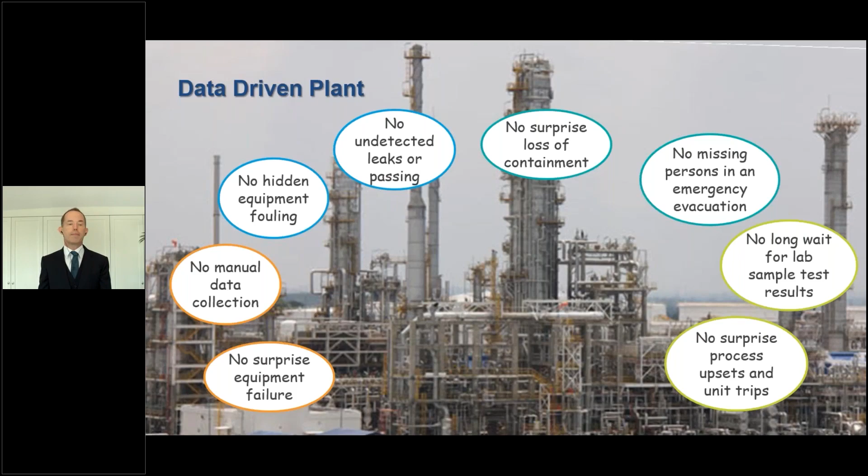So I'm going to speak about three things today. First, I'm going to start with a quick recap of the industry challenges, which is why plants need to change. Then I'm going to talk about digital transformation, which is really how plants are changing. And then lastly, I'm going to give some recommendations for what plants need to do. So I'm going to start with why. And it is really the state of the industry.

So several industries, like oil and gas and metals and mining, even power generation, are struggling right now and have been on a downward trend for a long time compared to many other industries. But even across all industries, they need to make some improvements. And really the reason for all of this is there are several disruptive forces going on in the industry right now. For instance, there are uncertain feedstock prices, there is unstable energy pricing, there's a shift in demographics as older, experienced people are retiring, and at the same time, plants now need to attract the young digital talent and also retain this new generation of digital engineers.

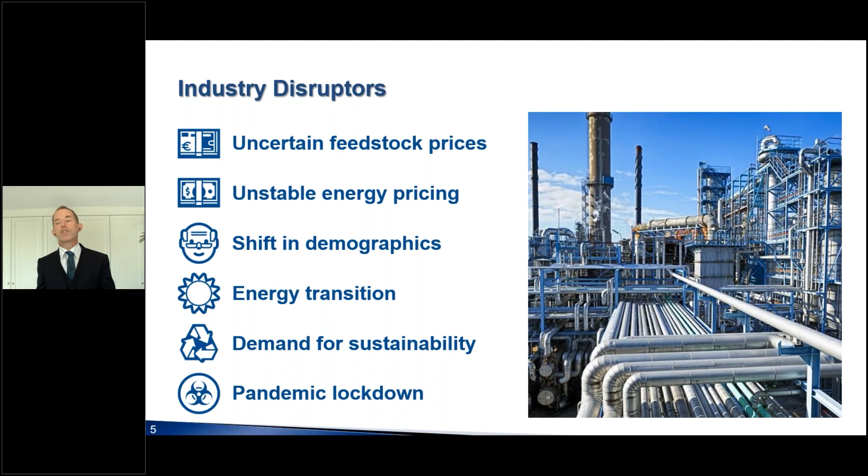There is the energy transition, and there's also a demand from society for plants to become more sustainable, more green. And lastly, of course, there is the pandemic lockdown, which to begin with has dramatically reduced the demand for many things, but also makes it difficult for people to work in the plant, as they need to maintain social distancing. It's also more difficult to bring outside contractors into the plant. So these are the main challenges going on.

So to tackle all of these challenges, plants have to change. They need to work differently. So really what plants are doing now is going towards remote fleet management methodologies. They have maybe a center, and from that center you actually manage multiple plants across the country, the region, and even the world. So they manage the maintenance centrally, and maybe even run the production centrally, depending on the industry.

And they're also going for more autonomous operation. So basically no scheduled visits to remote locations, dramatically reducing travel and associated costs. More enabled work from home, because very often you cannot come to the plant. And really going towards more data-driven ways of working, where we have the prediction and detection of what's happening in the plant, so we can decide what to do.

And lastly, a lot of things are being automated, but for the things that cannot be automated, like actual servicing of equipment, we provide better digital tools for those tasks. So really what the industry is looking for is new abilities to predict failure, detect fouling, losses and emissions, to predict hazards in the plant and predict process upsets.

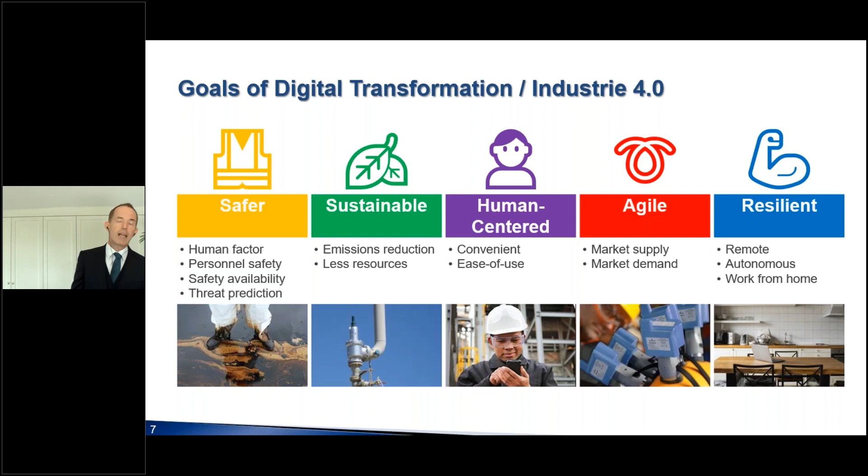And these tools should be easy to use. You should not have to become a programmer. You should not have to become a data scientist to use these tools. It should be possible to use these tools by the people which are already working in the plant. We also want to become more agile, meaning an ability to adapt to shifting supply and shifting demand. And lastly, to become more resilient. So these are the goals.

So what's the value of digital transformation and Industry 4.0? Well, it's relevant to every department within the plant doing the operations. So for instance, the executives are looking to reduce inventory, they're looking for reduced legal liability and the overall plant life cycle cost. If you look at the process and energy managers, they're looking to reduce emissions and carbon footprint through reduced energy consumption, and all of that then also increases the sustainability of the plant.

If you're looking at the safety HS&E department, they want to reduce the number of incidents. They want to reduce the cost of cleaning up after incidents. The production department is really looking to improve the throughput, increase the capacity of the plant. They want to become more flexible, meaning flexibility to handle different feedstocks, different kinds of opportunity crudes, for instance. They want to improve the yield of the plant and thereby also reduce the waste, yet at the same time not create any unnecessary quality giveaway.

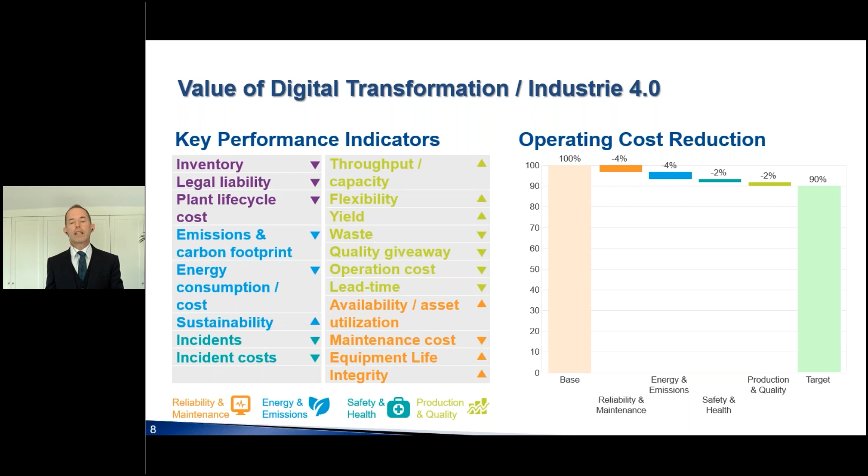And thereby also reducing operational cost by maybe less travel to remote sites and so on, and reduce the lead time for new types or new product grades, for instance. And lastly, reliability and maintenance. They are looking to improve the availability and the asset utilization. They want to reduce the maintenance cost, extend the life of equipment, and ensure the overall integrity of the plant. So those are the values.

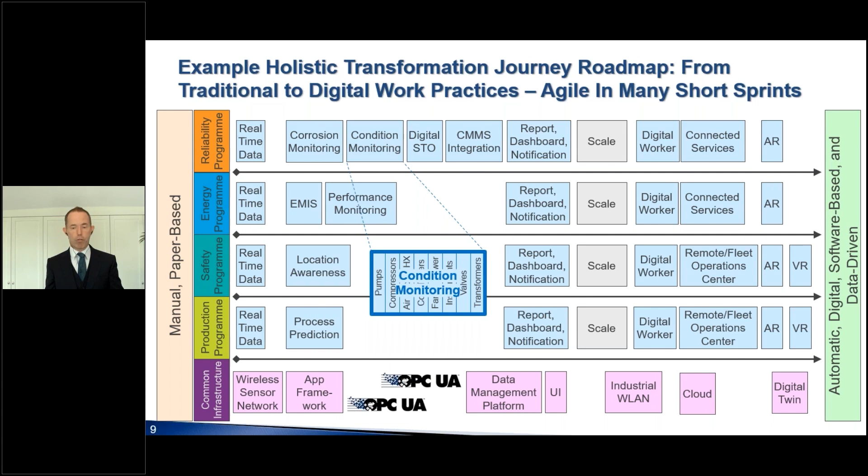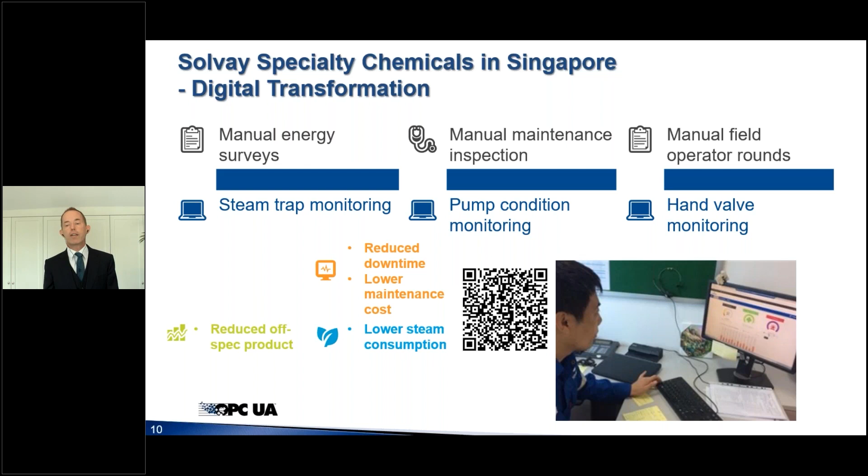So as an example, at Emerson, we work with a specialty chemicals company in Singapore. It's a program that's been going on for some time and still continues until today. To make that happen, OPC UA was used to integrate a new digital technology with an old existing DCS that they have, because we need to get some of that data. And thereby we managed to reduce off-spec product in the plant. We reduced the downtime, we reduced their maintenance cost, and we also lowered their steam consumption. You can read more about it in the article there. Just follow the QR code.

So let me give you some recommendations here. The first one being: decouple the level 4 business systems, the enterprise systems. So don't try to connect that too closely to your operational systems. They should be integrated yet separated. That becomes much lower cost to deploy and easier to support and secure in the long term as well.

Make sure that you have the right data. Many plants have lots of process data, but that's not enough. You also need to have equipment data. So you need to integrate whatever subsystems and additional sensors. Use modular apps, applications that can be added in to solve use cases.

Or you can remove them if you don't need them, or update them, and even exchange them one by one as use cases get discovered and get implemented. So don't buy one single monolithic software. That wouldn't work. It should be components.

Use an agile methodology. Don't wait for building an entirely new data management platform before you start the first use case. It's going to be very costly, and a long time before you can show any success. So start with the platform you have, let's say your historian. That is good enough for the first couple of use cases. And then as the number of use cases grows, you grow your data platform.

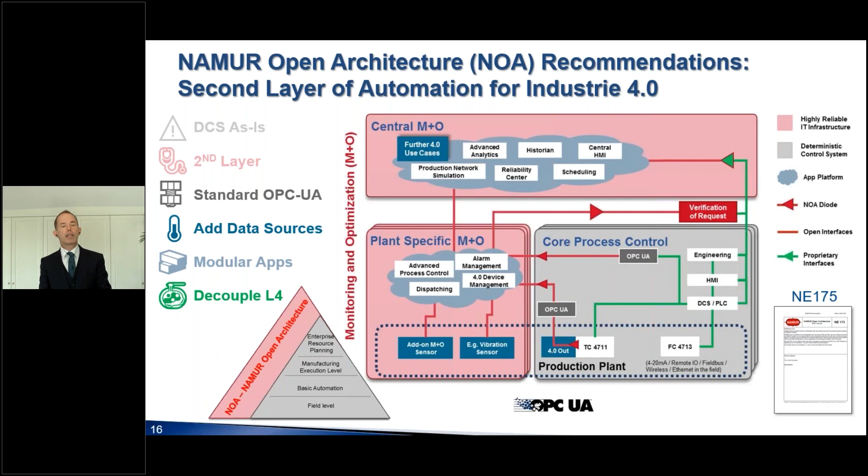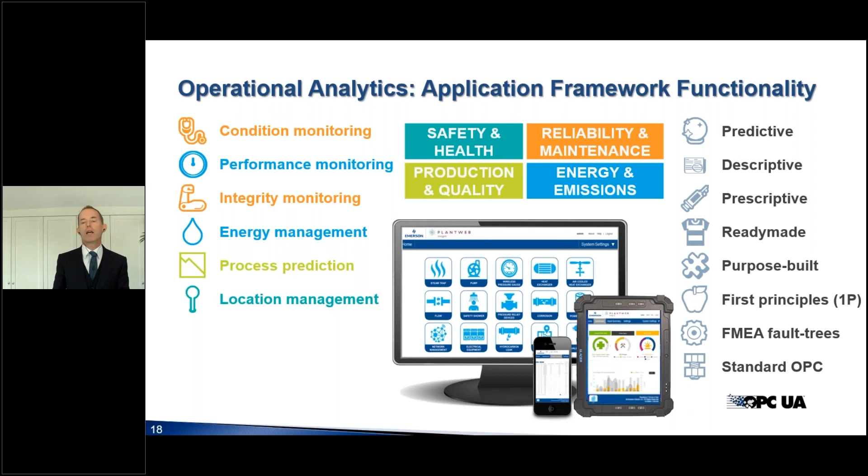So really the key to bring all of this together is the data management platform, which then needs to support OPC UA so that you can aggregate the data from all of your various data sources in the plant.

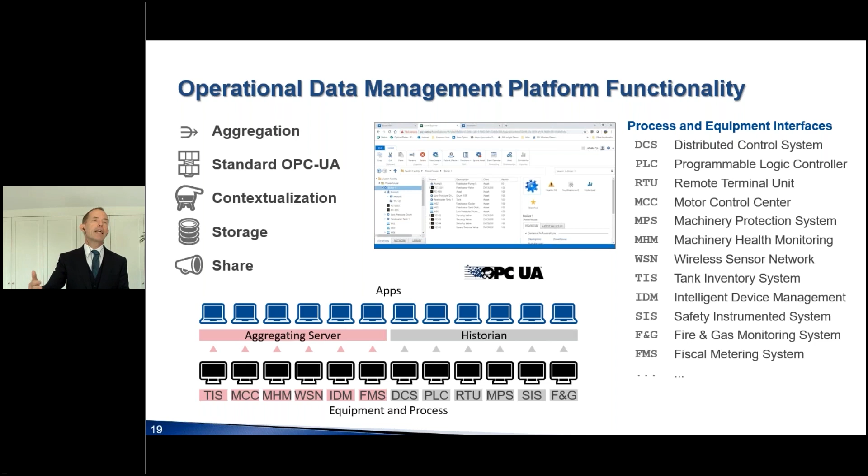It should also contextualize this so that the information is grouped together logically, so it becomes easy to use that information. Obviously, it stores the data, but then it also shares the data to all of the different apps. So both the aggregation and the sharing is through OPC UA.

So, well, the data comes from existing sensors, but also many additional sensors are required. And in fact, a plant might need hundreds or even 1,000 additional sensors. You can't practically wire all of these additional sensors, so that's where wireless comes in, okay? So again, technology selection is important.

There are lots of different wireless technologies out there for sensors, but make sure to use one which is an IEC standard, has 99% reliability, supports real time. 1 minute or 1 hour is good enough for many cases, but sometimes you need 1 second, or a few seconds. So you should support that too. Provide long battery life, like 10 years, so that battery replacement doesn't become a burden.

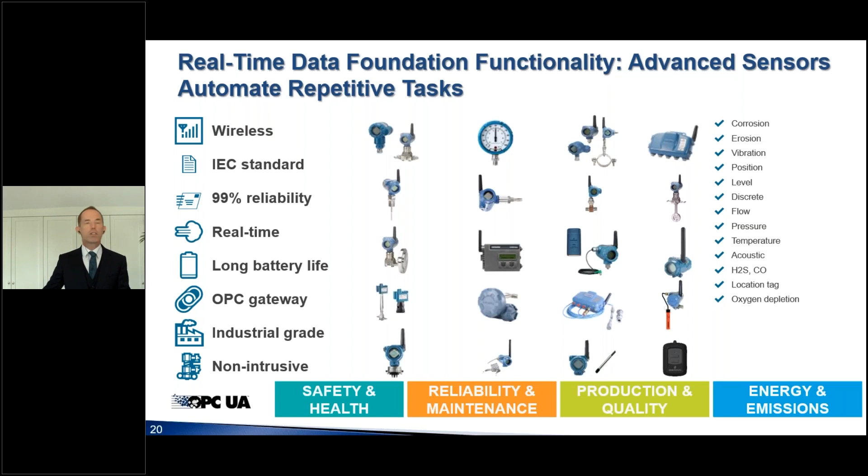Very important. The gateway must support OPC UA so that you can bring this data into your new analytics apps, but also to your existing control system. All of this should be industrial grade, and should also be non-intrusive, so you can easily install these sensors: no cutting, no drilling, no welding. And of course, since it's wireless, no power cord, no signal wires.

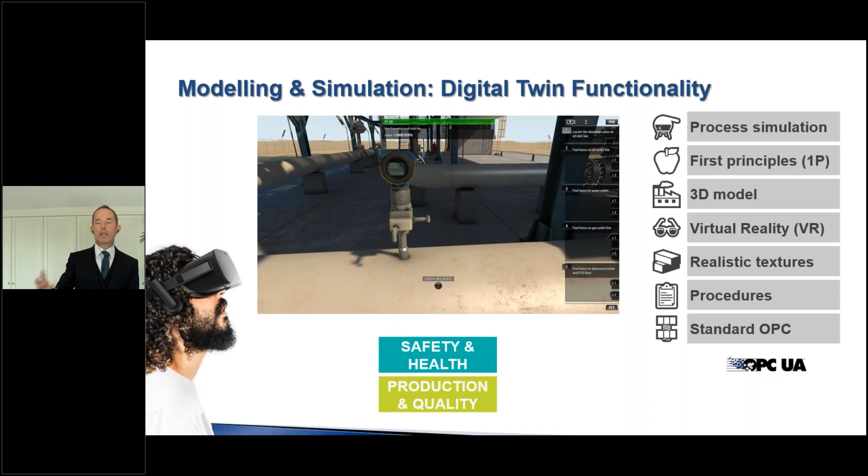Modeling and simulation, I don't think we really have much time for that, but again, a digital twin is not used for many use cases, but if you want to do virtual reality, you would need a digital twin with process model and also a 3D model of your plant.

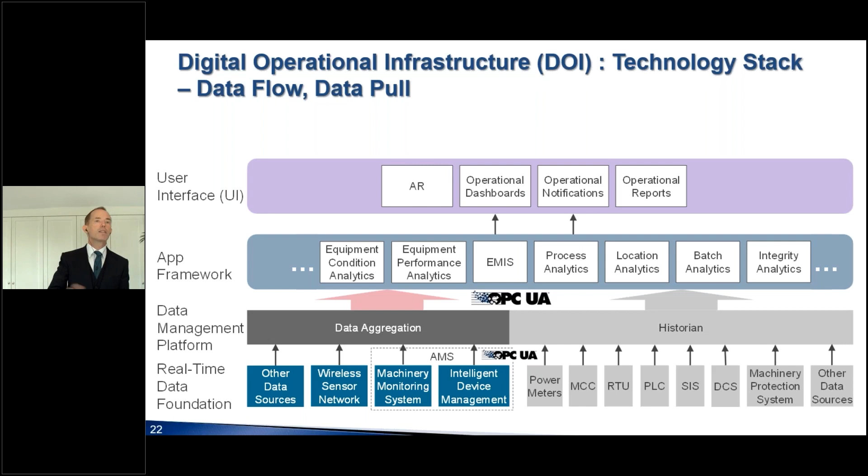Okay, so how does all of this come together? At the very top, you want to have dashboards, you want to have notifications on your mobile. That's the top layer, and all of that information comes from the application framework. That's where all of the analytics sits. That in turn gets its data from the data management platform. That's really where OPC UA lives, as the interface between all of these different software. And all of this rests on a foundation of sensors. Some are the sensors in your existing systems, some of them are new additional sensors.

So conclusion, I spoke about three things. First, the industry challenge: many industries are struggling, which is why plants are changing. Then I spoke about how plants are changing through digital transformation of how the plant is run and maintained. And lastly, I spoke about what plants are changing, and gave a couple of recommendations very much around OPC UA for how plants can adopt Industry 4.0 to tackle these challenges. So in summary, I spoke about the why, the how, and the what of digital transformation. So that's the presentation.